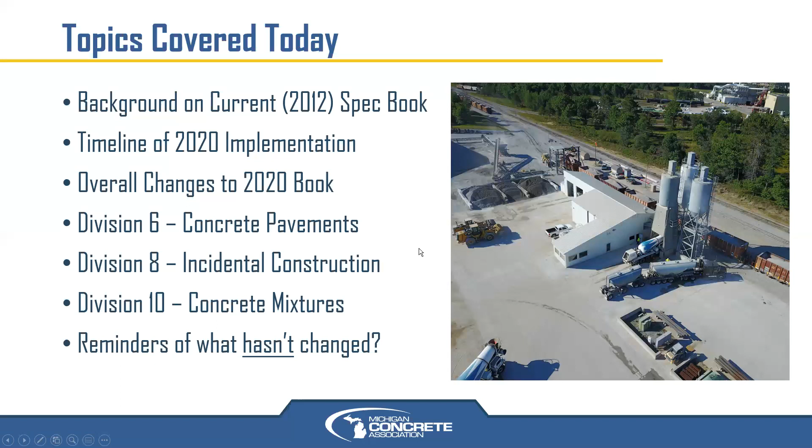So that is our agenda for this morning as it pertains to the MDOT spec book and concrete changes.

So background on the current spec book, 2012 - I don't have a screenshot of the printed cover, I don't know what color it's going to be. That's always a big debate, whether it's maroon or green or blue or whatever. They like to move it around over time. So I don't know what the printed version scanned cover will look like, and I don't have the 2012 one at my home office, but this is the PDF version pictured on the right.

It's currently 9 divisions, 9 main sections for the different construction items you'd see on an MDOT project, roadway or bridge construction. Division 6 is concrete pavements, Division 8 is incidental, which includes a lot of curb, sidewalk, curb and gutter, driveways, things like that - a lot of concrete items in Division 8 as well.

I'm not going to touch on Division 7, structures. Most of the concrete material related stuff does apply to concrete bridges and structural concrete, but as far as the bridge building, the MITA group takes care of that. We were not involved with the spec book revisions and updates in concrete bridge building items - that would be information MITA would have for you.

So we're covering primarily Division 6, 8, and the new one, number 10. But there was no number 10 in the 2012 book, so that's a little hint at what's coming up. A little background on concrete pavement mixtures - those were all specific to pavements, all in Division 6. And again, that's a hint at what things are being reorganized and consolidated.

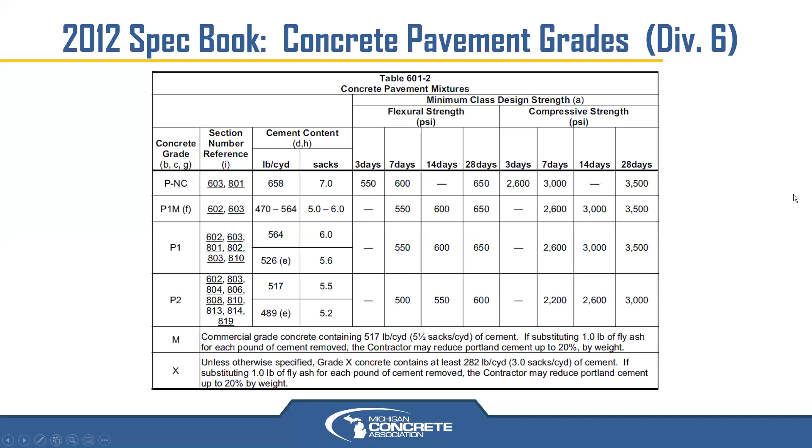So just a little background, this is where they were in Division 6. As far as what those concrete grades, those code names, that nomenclature means - P1M is high performance concrete pavement, pretty much the standard for all concrete paving in Michigan now. P1 is the old standard, still used for some miscellaneous concrete. Maybe local agencies who don't want to use high performance would still spec P1. A small project, even through MDOT, sometimes would still utilize P1 in low traffic situations. Nothing wrong with it - MDOT has just moved towards high performance for all their concrete paving.

P2 is a mix code name or grade that could be used for concrete shoulders primarily. You can always use a higher grade for a lower grade, so you can use P1 or P1M for shoulders, but P2 is pretty much only used for shoulders.

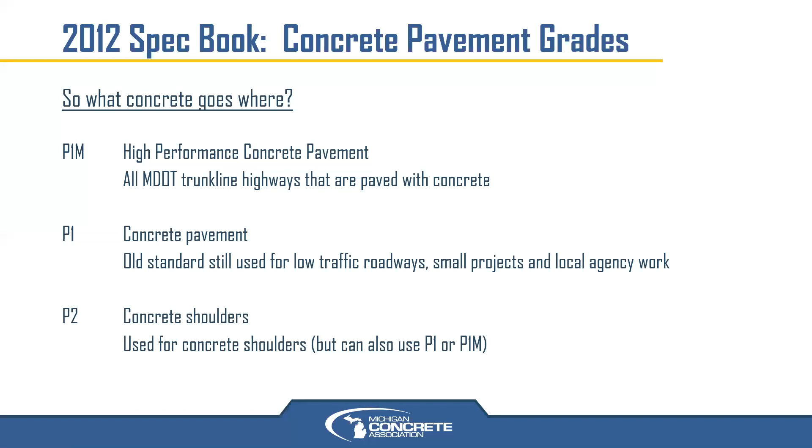P-NC is a patching mix. The NC stands for non-chloride.

This is the background on the 2012 spec book. This is not going into the new stuff yet. I want to make sure everybody's on the same page.

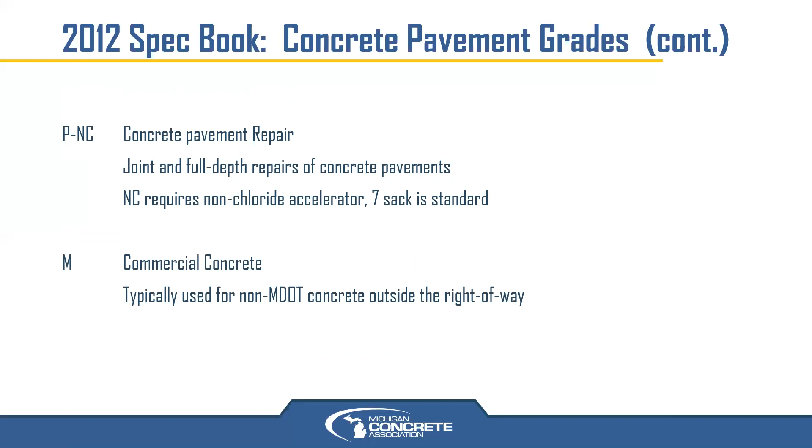P-NC is for joint repairs and full depth repairs, and M is for commercial concrete, typically non-MDOT concrete outside the right of way, if they have to replace a private business sign foundation, things like that.

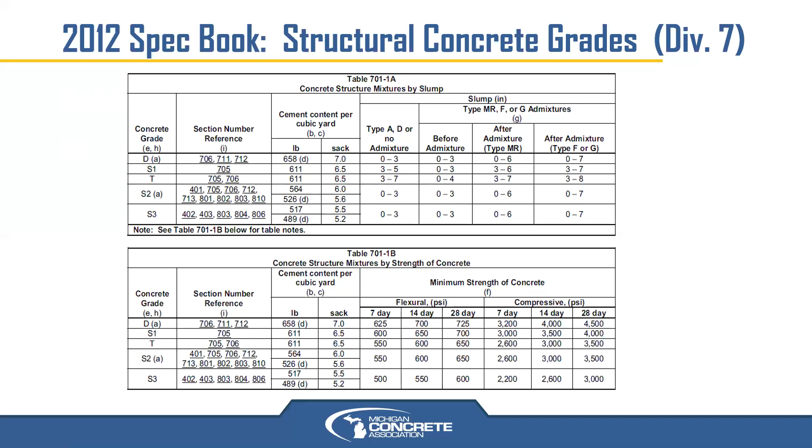Division 7, again, different code names for those. Don't get too attached to these because that's a little hint of what's coming, which is updated nomenclature for all this. But the spec book table, table 701-1A and B, covers structural mixes, and those typically start with S.

S1 is for foundations and piles, S2 for bridge structure, curb and gutter, driveways typically. S2M would be for high performance bridge structure. Usually not using that for curb and gutter or driveways, but it can be utilized. It's for high profile, high traffic bridges.

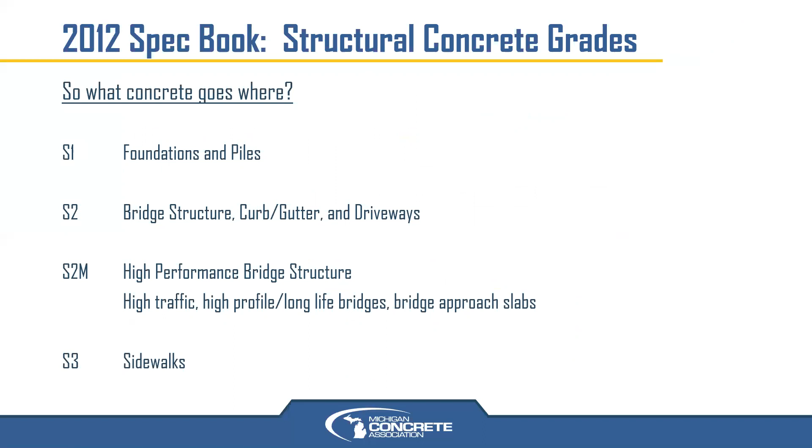S3 is typically just for sidewalks. D is our typical deck mix, which is why it has that code name. Again, these are all changing, and there's a hint of what they'll be called in the new spec book.

High performance bridge decks would be a DM. The M would stand for modified, just like it did in the P1M. Again, we're doing away with that. And then T is for tremie concrete for underwater use, typically bridge structure, bridge foundations.

However, with those tables being in the spec book, in the last 8 years, we've pretty much had that information instead also in a special provision for concrete. Depending on if you were a local agency project, it was the 604A special provision. I believe we're in versions 11 or 12 now, something like that, where all that information has actually been superseded in that special provision.

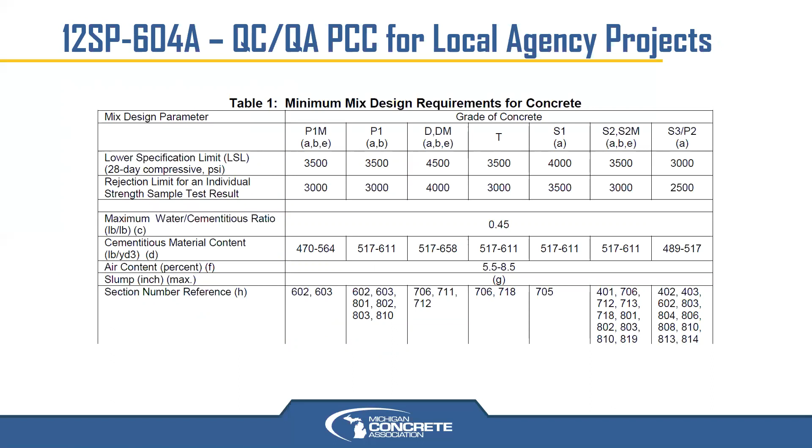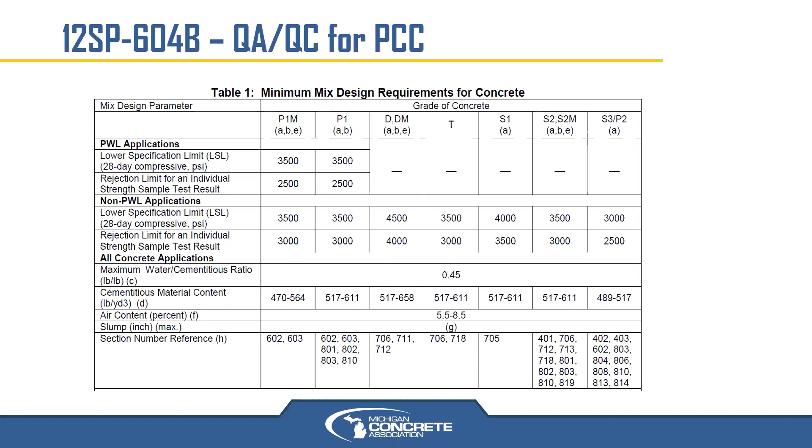Same thing for MDOT projects. They have their own special provision for QA, QC for concrete. The only reason why they would have a different one than local agencies, 604B instead of 604A, is because for concrete paving jobs, they will pay a bonus based on concrete strength and air, and do a percent-within-limits analysis of those test results for strength and air. For local agencies, no need to worry about paying a bonus on any concrete paving. That is only for MDOT trunk line type projects. But again, all the information is more in the special provision as it currently is.

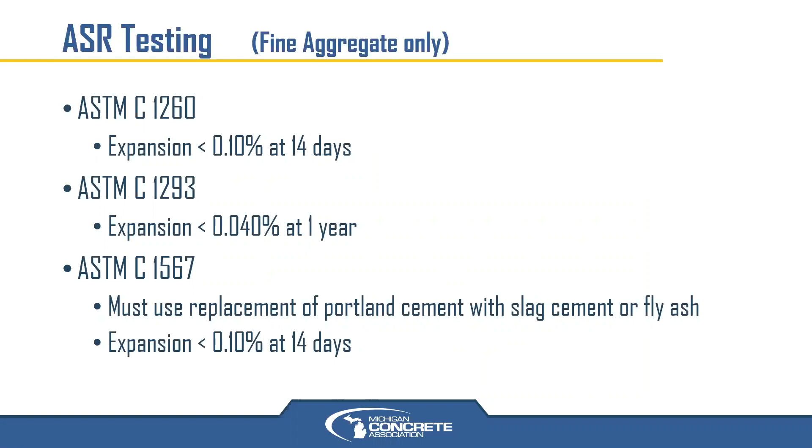Just real quick background on the current requirements in 2012 for ASR testing for your sands. There are 3 options essentially for that. You test the sand for 1260, a short test. It was taken out for a very short time and then put back in at the request of industry, because there are some sand sources that do utilize that test result to have passing results. The other option is the 1293, which is a year-long test.

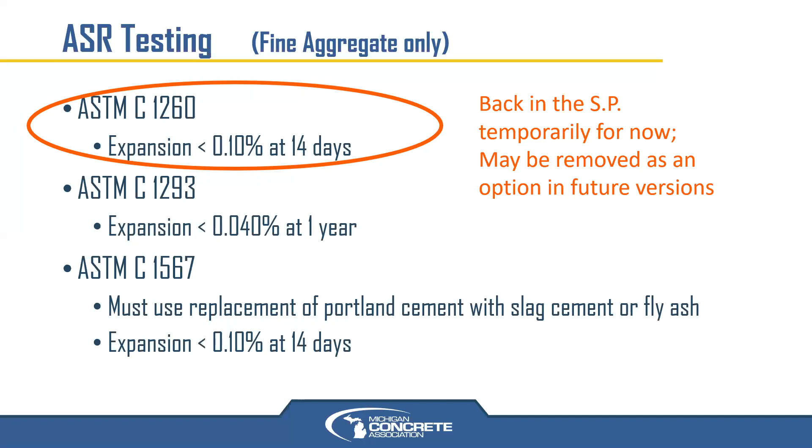If your sand fails either of those, if you do not have passing test results, you need to use the actual mix design of the mix you're proposing and check the mix with a similar type of test to 1260, checking for expansion using whatever mitigation to prevent that ASR that you are then required to use on the project. So that's a really quick background on 2012 specs just to get everybody up to speed.

So now we can dive into the 2020 draft spec book. It is available on MDOT's website. If you go to publications on their main michigan.gov/MDOT page, and click on standard specifications for construction, it is linked to that main standard specs page way at the bottom. It says draft 2020 specs. You download the massive PDF file for review.

Again, this is a draft as of July. Late July is when I last downloaded it, the latest version, and it is not finalized yet. So it will be finalized, as I've been told, fall of 2020. We are now a few days into the actual fall season based on the calendar. Leaves are starting to change, so that hopefully will be finalized in the next month or two.

And I've been told—again, I don't work for MDOT, I work for MCA—that printed copies and the final PDF version will be posted early 2021. That is the timeline. This was all going to be done this year, actually in time for the October letting later this week. But COVID really threw a wrench into all of that and pushed everything back.

So we are looking at early 2021 for the availability of the final version of it. Nothing is set in stone yet. And then it will be in full effect for the August 2021 letting. That is the plan. That may get shifted around a little bit, but definitely all fiscal 2022 projects, which starts October of 2021, will be using it, and actually some that are going to be done in a couple of months leading up to that. So that's what we've been told is the timeline for it, August 2021 letting.

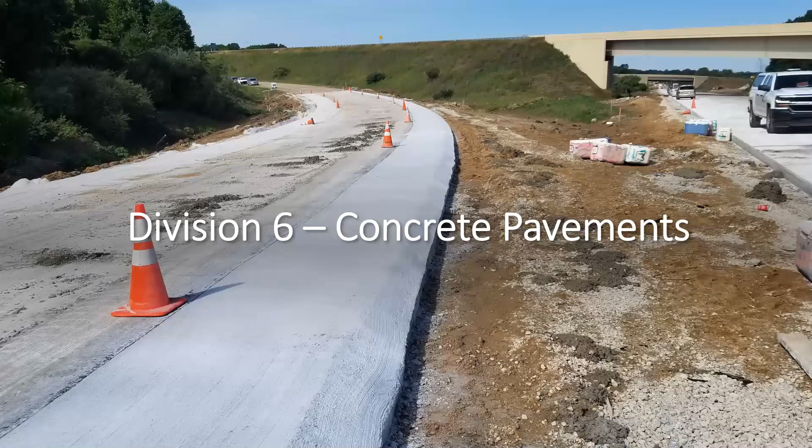Diving specifically into concrete pavements, we'll look at Division 6. There's a nice shot from the I-196 Hudsonville project from earlier this summer at the M-6 interchange. Section 601 is now blank, reserved. That used to be Portland cement concrete mixtures, and it's all in Division 10 now, split up and moved to 1001 and 1004.

Section 602, concrete pavement construction. You see a shot here of lane ties doing destructive testing, lane tie pullout resistance, where they jack to see the pullout resistance of that lane tie in the concrete slab. That exact one you see, I'm not sure if those were implanted or epoxy coated. It's hard to tell from the photo.

But if those were implanted in the fresh concrete, whether slip form or fixed form through the forms, that would not be required now for the future. Pull-out testing is only required for lane ties that are going to be adhesive anchored into the hardened concrete. So they drill the holes, blow out the dust, take a wire brush, clean out the hole, blow it again, insert epoxy into the hole, and then stick the bar in, and the epoxy flows out. You can use a cementitious grout as well. Most contractors choose the epoxy, then allow it to set. MDOT does require verification testing to make sure you have proper pull-out resistance. So this test you'll see less of for those bars, and none where those bars are implanted into fresh concrete, only adhesive anchored. That is a change from the current 2012 spec.

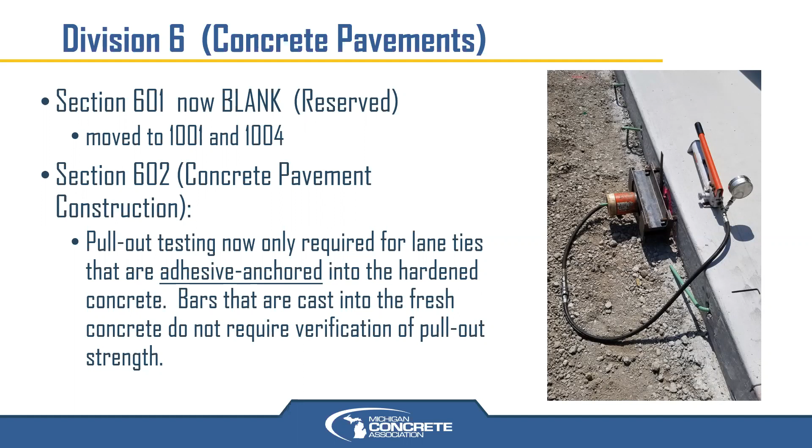Another change we're going to see is the dowel alignment for the entire length of the bar, which is an 18-inch long bar that you see in the basket there. Dowel alignment now is going to be required to be 1/2 inch over that 18 inches, as opposed to 1/4 inch. That is more in alignment with what other states around us are doing.

This is most likely a result of MDOT's participation in the National Concrete Consortium, where a number of states get together, state DOTs along with industry, and talk about best practices and the latest and greatest. MDOT has realized that other states have been using this 1/2 inch alignment over the 18-inch bar for a very long time, with very little problem as a result.

The guy standing there with his back to us is the technician with the adjustable level in his hand, based on the grade of the roadway, to verify alignment. The level has cups on each end that he sets on those bars once they are in position and staked and pinned down into the grade below.

Second thing, the test joint. This is for slip form paving jobs where they utilize a dowel bar inserter, which this pictured project is not utilizing—they're using dowel baskets here. But if the contractor elects to use a dowel bar inserter with loose dowels incorporated into the paving train, MDOT requires them to do a test joint periodically on each bound, a certain number of times depending on the size of the job, where they pave out beyond where they're going to saw back and create their header for the next pour.

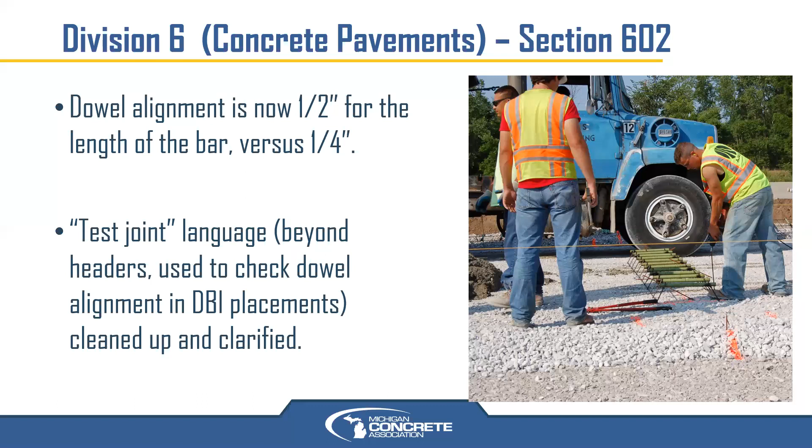Another very slight change: the texture and cure machine you see pictured here—instead of requiring tracks, which you see on this machine, it just needs to be steering controlled. All of them do have tracks. There are some rubber tired machines available, but they're generally not steering controlled; they're more of a work bridge. So that was simply clarified so that as long as it's steering controlled, they're getting away from a means and methods type of requirement and going to more of a performance base—if you can control the steering of the machine so it provides consistent groove alignment and depth, it doesn't require steel tracks, rubber tracks, or rubber tires.

As long as you can have the proper end result, you're not going to dictate the exact piece of equipment that you need. So that's very slight as it matters to the contractors—they're still really only one machine available, the type you see pictured.

Still produces the best results. But one thing that's new is that no quality control coring will be allowed. Only the department, their engineer, firm, or representative will be coring the pavement for QA purposes. Some contractors in the past have utilized their own in-house QC coring procedure just for their own information, but MDOT does not want to make Swiss cheese out of all their brand new concrete pavements. So they're requiring contractors not to do that. It will no longer be allowed. There are still verification cores on the QA side.

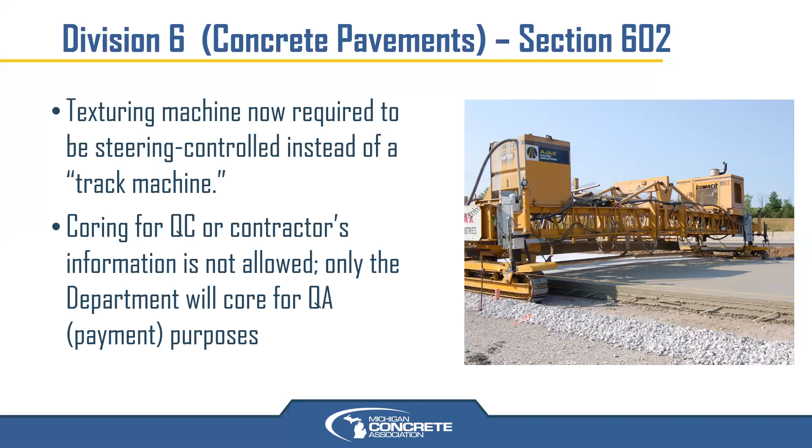One of the larger changes is the fixing of spalls in new pavements. They've really simplified this very much. There was about 2.5 pages in the old spec book devoted to spall repairs of new pavements, which, if you do it right, you shouldn't have any. So why are we devoting that much time and effort to it? That means we have a problem, and we should fix the cause, not the symptoms of that problem.

So they've simplified it: anything less than 1 inch, just fill with joint sealant during the joint sealing process. Intermediate spalls, less than 4 inches by 2 feet, saw cut the edges and fill with a certified material from the qualified products list per 914.05—spall repair materials are in Division 9, Section 914.

Major spalls, anything greater than an intermediate spall, fix with a standard concrete pavement repair. If it affects more than 2 slabs, you may get into removing full slabs, but at the very least you're looking at Standard Plan R44, a concrete pavement repair standard plan, doing a regular full depth repair to fix that spall at that location. So that's, I feel, a significant improvement—much less invasive for minor spalls, but a much better fix for major spalls. Again, we shouldn't have those on new pavements, but sometimes it does happen.

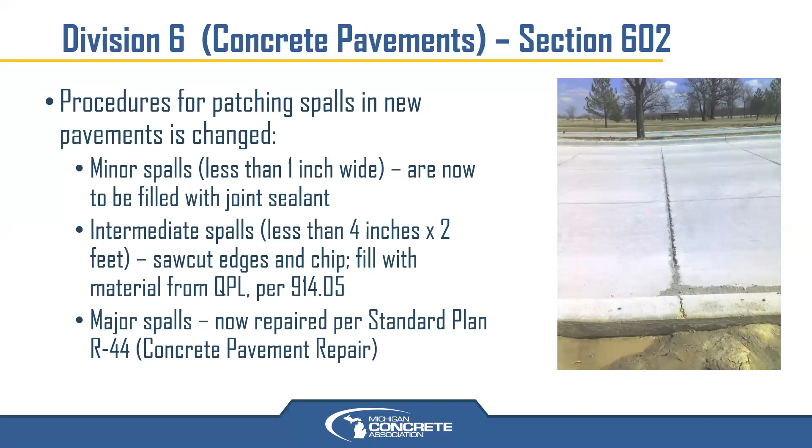Here's another change, because nobody is used to this measurement procedure—we're going to see how things work out with this. Cleaning joints prior to sealing.

The vertical faces inside the joint, the sides, need to be roughened to a concrete surface profile chip number 2. If you don't know what that is, go to icri.org—you can physically order a set of these chips. I believe they go from 0 to 9 or 1 to 10, with 0 or 1 being super smooth and 10 being like a milled surface, very rough. So shot blasting is somewhere in there, sand blasting is somewhere in there—milled, shot blasted, sand blasted, all those different textures are represented on these chips.

I foresee ICRI getting a huge surge in orders of these rubber chips that come on a large key ring type of thing, that folks will want in the field to verify if the inside of the joint has the roughened surface to the right level. But that's what that is—go to icri.org to find out more about that.

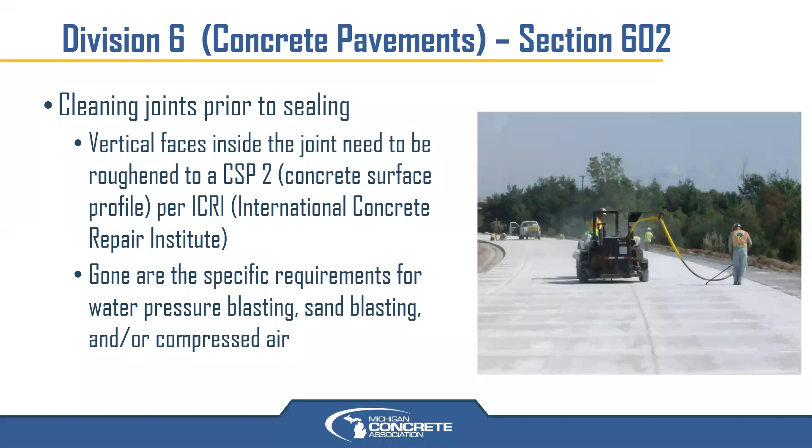What that's replacing is specific PSI requirements on water pressure blasting and/or sand blasting and/or compressed air used to clean the joint. So again, it's more of a performance specification—instead of saying your water needs to be 1200 or 1500 PSI, or your compressed air PSI is too high or too low, as long as you can get the inside of that joint clean so the sealant can adhere to the sides and stay down in the joint, you can use whatever method you need. So the inspector actually has to check that those joints are clean and properly roughened, as opposed to just checking off a PSI value on some checklist. It's a little different as far as the inspection in the field there.

Another minor change: cold weather limitations. MDOT at first wanted to require blankets in anything under 40 degrees Fahrenheit, which is the ACI definition of cold weather.

So industry said, well, if it's not freezing, there's no reason to really have blankets. We can get by with plastic sheeting just to keep the heat in to get that curing process continuing, and harden up that slab.

So plastic sheeting is going to be required in the 33 to 40 degree range, because again, that is cold weather. It's not freezing, but it is cold weather. And anything under 32 would require insulation blankets with at least an R value of 7. So we felt reasonable: if you do have freezing temperatures, you're going to want to insulate that slab, and if you do have cold temperatures under 40, you're going to want to at least protect it with plastic.

So that is a little different. That has been added to the spec based on some recent experience in the last couple of fall seasons where we've had concrete paving going late into the fall and early into the winter on some jobs in the last few years.

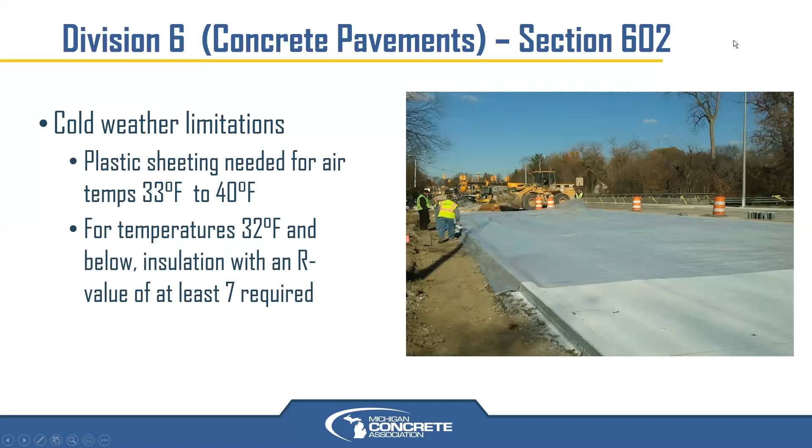So that's it for concrete paving. I know there's some agencies on the call that probably don't do a lot of concrete paving, and you're more interested in the other uses of concrete, which is obviously why we want to cover that as well.

Here in Division 8, incidental construction, here you can see I'll call it an ADA ramp being constructed. The terminology is all changed, so we'll get into that and why they're calling that, and some differences and changes you're going to see on all your jobs, regardless of the pavement type, where you do have these incidental items: curb and gutter, sidewalks, driveways, etc.

First off, Section 803 in Division 8 is for concrete sidewalk, curb ramps, and steps. The old spec, current 2012 spec, calls them sidewalk ramps versus sidewalk, because you pay for this ramp area separately than the main part of the sidewalk, since a lot of agencies require thickening of this, there's more attention paid to the stakes and the grades and string lines and forms and things. This has always been a separate pay item for sidewalk ramp, but now they're changing the terminology to curb ramp.

Because a lot of sidewalks also have ramped areas with running slopes that match the road grade or the subgrade grade of surrounding ground, they wanted to make sure that when you approach an intersection or a curb or the edge of the roadway, they're calling it instead a curb ramp.

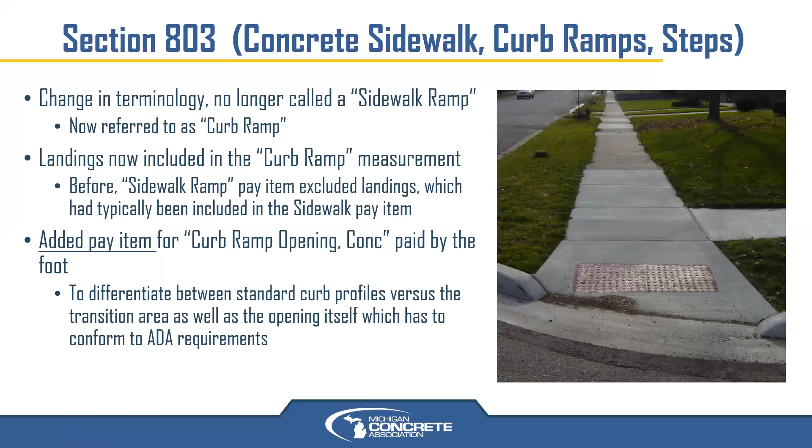So that's the big one in Division 8. And then the big one overall is that we have a brand new Division 10, Portland cement concrete mixtures. So this is now where you're going to go for all your concrete material related questions. We have 6 sections in this division.

Concrete production equipment and facilities used to be in 601. Contractor quality control was typically 604. Quality assurance was 605. Portland cement concrete mixtures, a lot of that was in 601, and a lot of it was in the special provision as well that you've been seeing for the last 8 years or so, various versions of.

And then some of your structural and miscellaneous cementitious type mixes are in 1005 and 1006. Those are the ones from the Division 7 structural concrete or bridge division in the spec book. Since they are cementitious, a lot of our ready-mix suppliers do supply those via ready-mix, but can also be mixed on site depending on quantities, etc. But those are in 1005 and 1006. So Division 10, everything related to concrete.

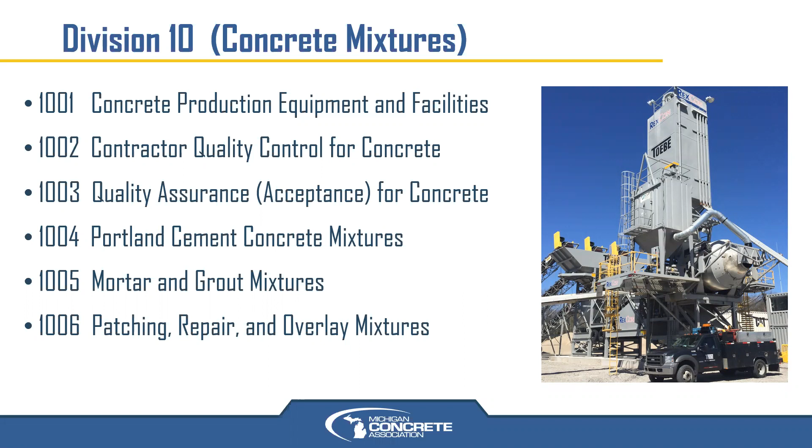What is the big change? Well, this is going to be the big one for everyone. All that nomenclature that I talked about before, P1, P2, S2, D, DM, P1M, all of that is changing to a PSI or strength classification. Again, this is what the industry has gone to. This is what, in general, our ready-mix producers and concrete producers like to go with, which is: you tell me how strong it needs to be, I will use certified, qualified, tested materials in that mix, and we'll classify everything by strength.

For exterior concrete, which is all MDOT concrete, it requires freeze thaw resistance and air entrainment, except for things far below the frost line. But most of it does. We will obviously have air entrainment for all that, but the main thing is we're going to classify everything by strength.

If some of you may remember, we kind of were that way in years past. I think D45 or 45D was the bridge deck classification in the past. I believe maybe some county agencies still relied on a similar type of nomenclature for their mixes, but that was what MDOT is going to.

So P1 and P1M both are 3,500. However, P1M being the high performance, with a little difference in the optimized aggregates and things there, requires that HP classification as well. If you just spec 3,500 for your pavement or your curb and gutter or whatever it is, you're just going to get the standard mix. If you specify an HP, then you'll get the optimized gradation and typically a special provision included in the proposal to specify the requirements of that high performance mix.

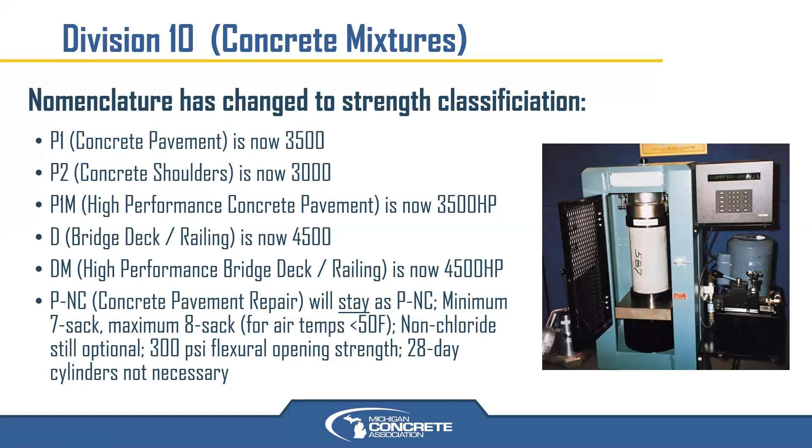Your Tremie mixes are now essentially the same as your S2 and P1 because they're just based solely on strength. If there are any other different requirements for a Tremie mix, as far as aggregates, admixtures, water content, etc., then the concrete producer would have to obviously note that with their mix design submittals, which is something we'll talk about on Thursday morning when you tune in at 10 a.m. We'll talk about JMF submittals and mix designs.

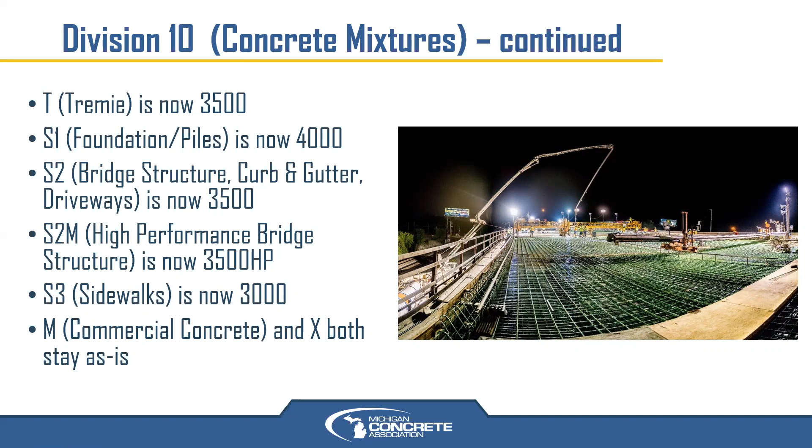But S1 is a 4,000 mix now. S2M for those that do a high performance bridge. S3 sidewalks is a 3,000, just like P2 for shoulders. S3 - so just remember it's a PSI requirement from here on out. And what do we need? 3,000, 3,500, 4,000, 4,500, and is it an HP high performance type of mix?

So let's look at a chart that has the summary of all these. We've got the new code name along the top, the old code name that we've been used to for a number of years and decades, and then what those items are typically used for. I'm sure I'm leaving some things out as far as what each of these mixes can be used for.

Many times you can often use a higher grade of mix for a lower grade item, as long as the other requirements specific to that item are met - if there's certain aggregate requirements, minimum cementitious or minimum supplementary cementitious materials, water cement ratios, things like that. But you typically can use a higher grade for a lower item on your project to group things together for lot sizes or ease of construction.

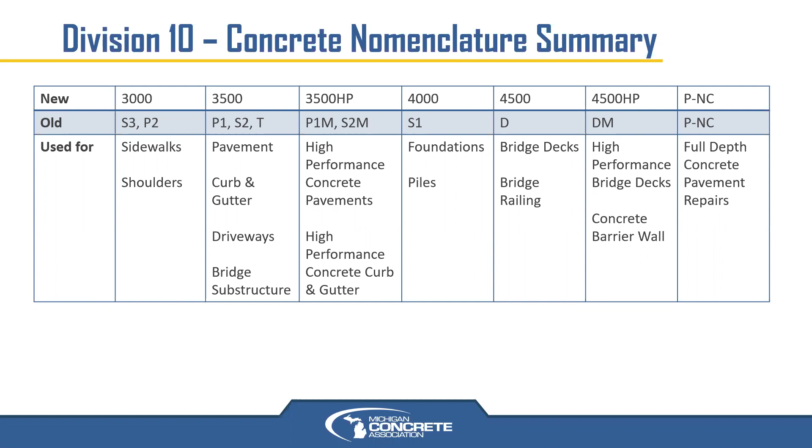But that's your summary chart of what you're going to be using from here on out.

Another change, which we petitioned for and MDOT agreed to, is with the old table 601-1, our haul time table, which concrete pavers with their portable plants and our ready mix producers always look at as far as what they're allowed for haul times from their plants. MDOT did not want to change the times. We just wanted to have a little more flexibility with some of that.

Our rationale for this change, which we suggested as an industry and MDOT agreed, is that most mixes nowadays have a minimum supplementary cementitious content, fly ash or slag cement. Fly ash and slag cement make better performing concrete overall, long-term especially. We said that because of this, that has a retarding effect in most cases, particularly in the normal to cooler temperature ranges.

So we said, what if we bump that lower temperature limit from 60 to 65? Therefore, in those still fairly cool but slightly warmer temperatures, we still get that longer haul time on our concrete. It might seem like a very minor change, and it probably is, but it gives our ready-mix producers a little more flexibility in that cooler weather, because most of their mixes have that cooling effect and slowing down of the set with the higher amounts of supplementary materials.

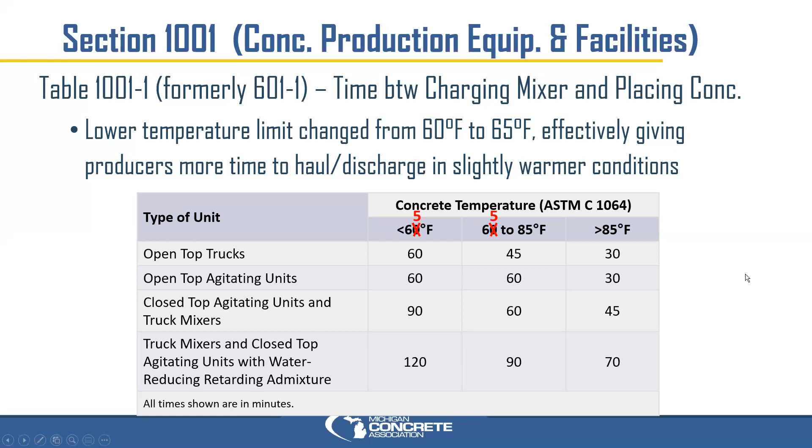Another slight change, but one that may help with some confusion and disagreement on projects in the field, is that they've clarified and added more language about adding water to a mixer on site. You can adjust a mixer on site when it pulls up and it's low on slump or has low water cement ratio, as long as you're not bumping up against your maximum water cement ratio yet. You can do that in multiple increments, as long as they're added within 15 minutes of each other and mixed in.

This is similar to what is already in ASTM C94 - I think it's almost the same language. And all those water additions do have to occur prior to the start of discharge into the forms.

You can't, as it's always been, pull up on site, add water to the mixer, mix it in for your 30 revolutions, start your discharge, get 2 yards in, and realize you want to add more water. I know that's done a lot on commercial and residential jobs, but on MDOT jobs, they allow one addition of water at the beginning and mix that water in, and if you start discharge into the forms, you're not allowed to add water after that.

However, if you haven't started discharge, you've added a little water, mixed it in, and do a quick check test to verify your slump, and you're still too low, still too stiff, not enough workability for the contractor, and you're not up against your maximum slump or maximum water cement ratio, you can add water again, as long as you're still within 15 minutes from the first addition. You're not allowed to start discharge into the forms, but you can discharge to do a check test to verify that and add water again. So that aligns with ASTM C94, the industry specification.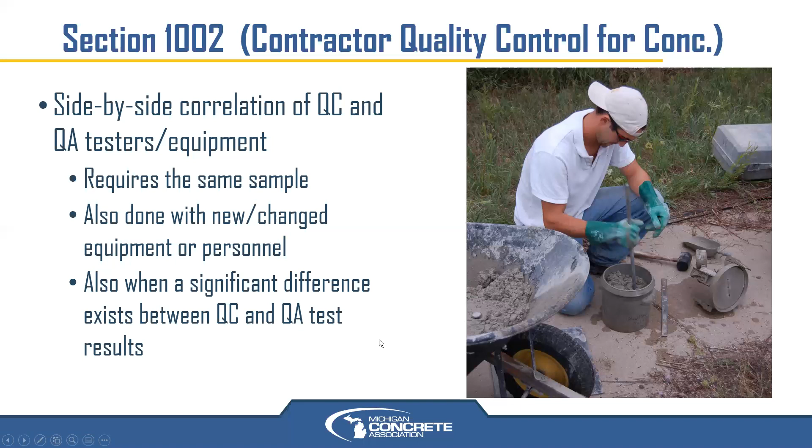One thing that we advocated for is that it's always been that QC test results have to be submitted to the engineer, the QA personnel, within, I believe, 24 hours. Well, we wanted that information flow to occur the other direction as well. So we have advocated that the QA results, as soon as they have them, also be submitted within 24 hours. And so then they made that contingent on when they receive the QC results, they have to submit the QA test results back within 24 hours. So if they have fresh concrete results, the concrete producer or prime contractor or concrete sub is not waiting more than 48 hours to get relatively real-time results from the other side of the testing, so that they can compare QC and QA results prior to identifying a problem at 28 days. And again, the break results, like you see an example of here at 28 days, those need to be submitted within 24 hours of when they are generated.

So not just the fresh concrete, but also the hardened concrete results. So that is new for those of you on the QA agency, consulting for agencies side. You may have already been doing that, which is good practice, and it depends on where you go, whether there are folks that choose to do that. But now it's required within 24 hours.

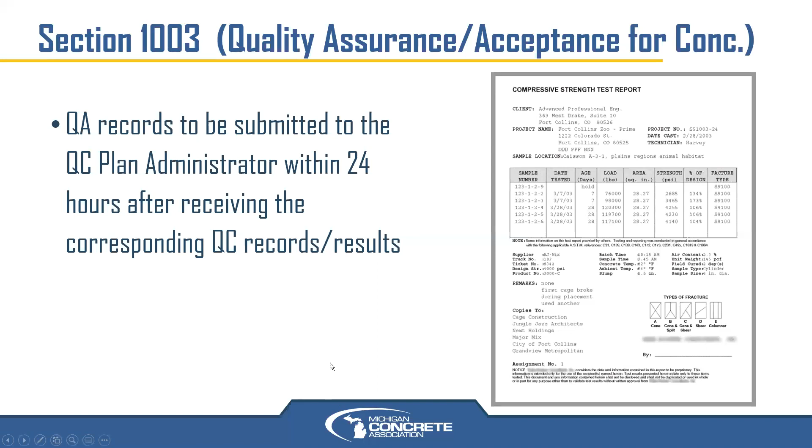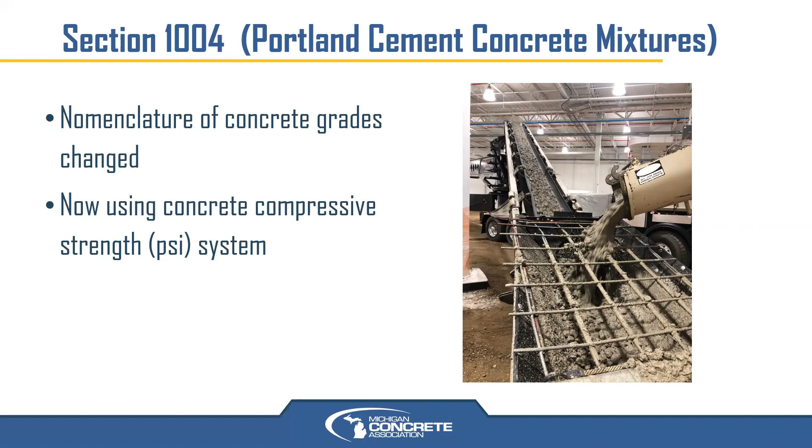Again, the big change, they're listed in section 1004, is the nomenclature of all the mixes. You're not going to be seeing the P1s and P2s and S1s and S2s and Ds like you did in the past. It's going to be all by concrete strength classification, PSI.

For P-NC, you only need 300 PSI, again done in the field with a similar curing condition as the patches themselves. If they're covered with blankets, cover the beams with blankets. If they're just sprayed with curing compound, spray the curing compound on the beams. As soon as you get 300 PSI, the repairs are open to traffic, and full payment for that item is payable to the contractor.

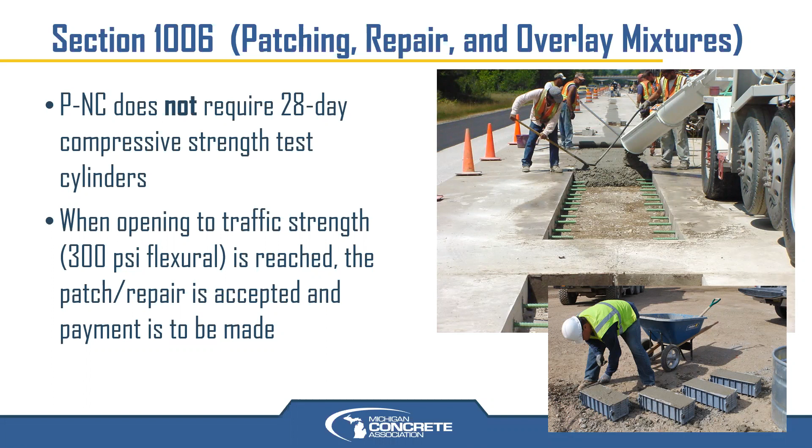No 28-day cylinders.

Quick reminder of what has not changed in the spec book as we're pushing up against our 1 hour time frame here. We have a new division, division 10, concrete materials, but everything that goes into that concrete, sand, stone, cementitious, supplementary cementitious, water, etc., it's all still in division 9. But if you happen to make concrete with those division 9 materials, then that's in division 10.

The ASR testing, like I said, still is being required. It is still valid for 2 years. There was some discussion about pulling out the 1260 results. That's still in there for now. There also was some discussion about requiring it every year.

So you always have a test going, because what we've seen with some of the aggregate producers, sand producers, is they'll run a test, a year-long test, and then they get their passing result and say, alright, I got 2 years, not knowing that 1 year from that test result, they need to start another one because it takes a year to run it. So during the second of those 2 years, they need to be running their next test so that they have a result that hopefully passes when the 2 year period is up. We've run into that with some of the sand producers in the state. So then they scramble and try to get a year-long test done in less than a year, which doesn't work.

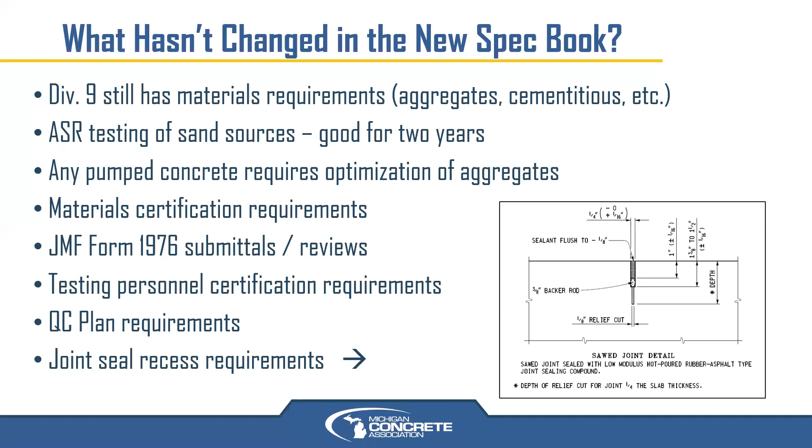So I'm pushing on 1 hour here. I know we allotted an hour and a half, just so everybody - we had enough time for the presentation and any questions. But to summarize what we're seeing with the new 2020 book, the big change is the new Division 10, concrete materials. All the other divisions, 6, 7, 8, have information being pulled out and put into Division 10. So you'll see some blank spots, some reserved sections, some smaller divisions there now.

And with that, the nomenclature has changed, the grades of concrete. We don't have P1M anymore - that's going to be 3,500 HP. We don't have D anymore - we have 4,500. It's all based on compressive strength.

Another one for concrete pavements, lane tie pullout testing only on adhesive anchored bars, not on the implanted bars into the fresh concrete. We have a new pay item for curb ramp opening, where your curb and gutter profile dives down and has to meet ADA requirements in that area, because that is a traversed area by pedestrians, and that's being paid for by the lineal foot.

I have not seen the details yet as far as where they're measuring that to - if it's just in between the transitions, or is it at the back of the transition where the curb and gutter profile goes back to normal, or how far, or is it the first joint beyond? I'm not sure on that. Just be aware that is going to be changing in the future, and we'll check into that and hopefully have updated information once we get closer to August 2021.